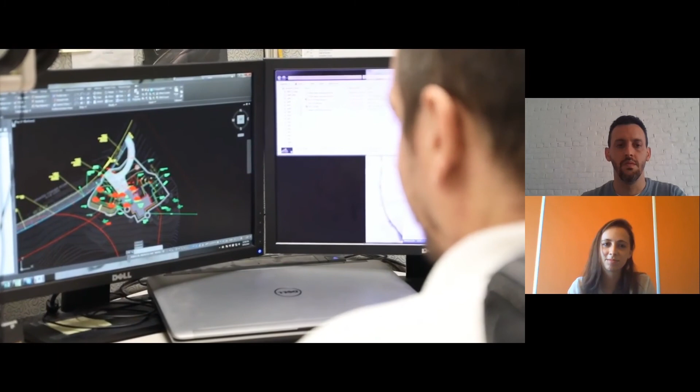While it's beneficial to the environment, I think what we're going to start seeing is the long-term benefits to the developers by actually incorporating these items as the environment changes. So I think it's on us as the design community to be as cutting edge and efficient and resilient as possible with the work we're doing. I think we need to rise to the challenge and have work that accommodates all modes of resiliency, both social and physical.

All right, so hope everyone is warmed up after that. Here today, it's myself. My name is Ed Confair. I'm the Senior Program Manager for Resiliency at E&LP Associates. What that means is I get to work on all of the cool projects where we get to incorporate green infrastructure into public space. And as both a civil engineer and landscape architect, that's kind of my dream. So I'm happy to share that work with you here today.

I'm gonna let my colleague introduce herself. Hi, I'm Megan Schmidt. I'm a project engineer out of the Philadelphia office for E&LP. I love working on projects that Ed loves working on. So green infrastructure and public spaces excite me. And when we get to combine them, that's a really impressive project for me.

So we've got three main principles that we've structured our presentation around today that summarize our approach to this topic of incorporating resiliency in the public space. So number one is a really big picture planning perspective, really at the government level. We're going to show a couple examples about how that happens, often before we as designers even get to come into a project. Principle two is defining criteria.

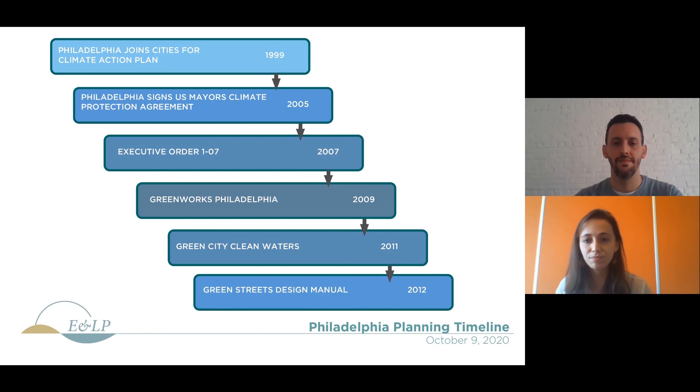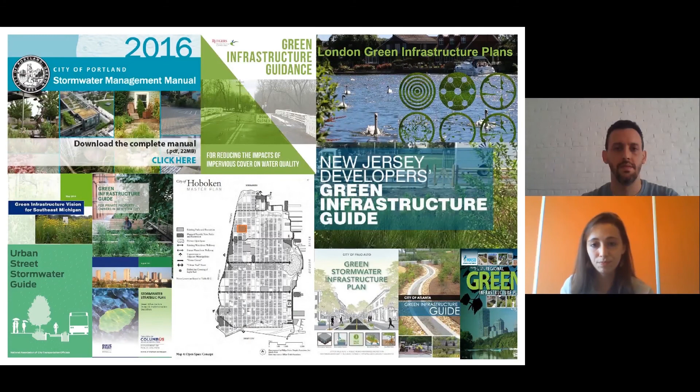So Philadelphia is not the only city making these efforts. Throughout the world, countries, cities, states have all adopted different guidance policies for designing stormwater management systems and becoming more resilient. Today, we're going to take a more specific look at the city of Hoboken and how its master plan goes from planning to reality.

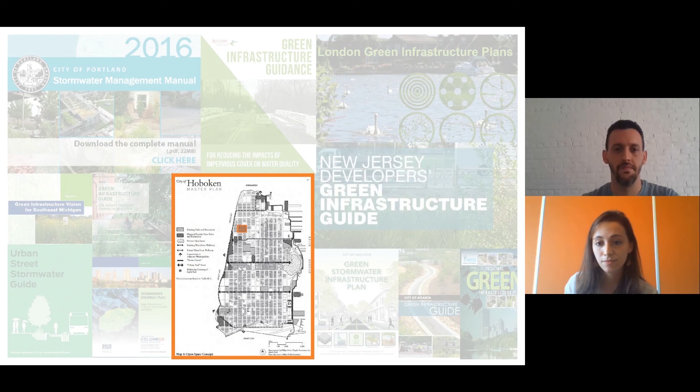So thank you, Megan. So Hoboken, New Jersey, just like with Philadelphia, this is a repeatable process for any governing body that wants to undertake a holistic approach to resiliency planning at any level of government, really. So, just like in Philadelphia, the early 2000s, Hoboken is very flood prone, and they started to look at their master plan and identify parkland and public space that could contribute to a long-term vision of resiliency planning.

They really followed through a decade later by realizing and adopting their green infrastructure strategic plan, which starts to identify specific sites throughout the city that can help them achieve certain performance criteria. One in particular is a large 5-acre lot in the northwest of the city, which became the site for the Hoboken Northwest Resiliency Park.

Hoboken is also a key city participating in the Rebuild by Design effort, and they're one of the few cities that partook in that effort that is following through with the implementation of the ideas and designs that came out of it. In 2017, they took action to actually purchase land to build a resiliency park on, and in 2019, the North Hudson Sewerage Authority, which is a key contributor and partner in this effort, adopted and adapted their long-term control plan for CSO reduction, featuring a key piece of infrastructure in this park.

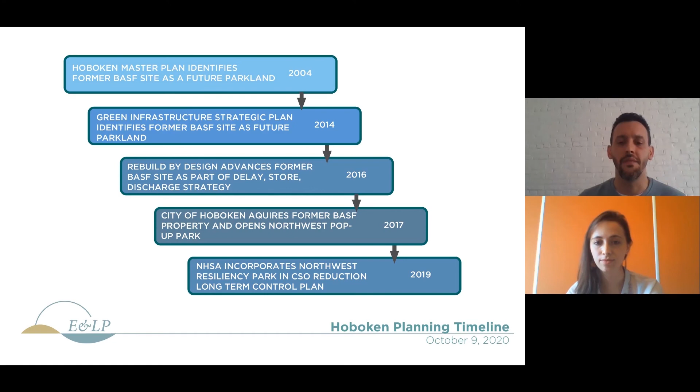So this is a look at the strategic planning document for green infrastructure. They took an approach of looking at elevation-wise what's in the city. Hoboken kind of has an elevated ridge running north-south in the city, and then it drops off until along the western edge of the city, you're really down in what was historically marsh and swampland. So the city identified different appropriate green infrastructure BMPs that could work at those different elevations and risk of flood throughout the city, and that created a framework on how to move forward with design projects in any one of those areas.

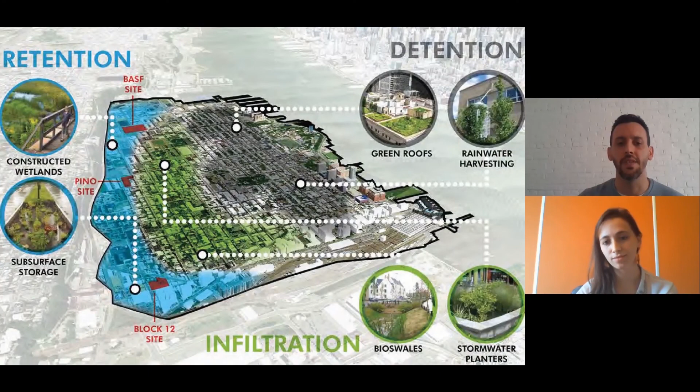So physical infrastructure planning. Remember, we're looking at physical and social and how they tie together. So we're going to start with physical planning here in Hoboken. So Hoboken, this is the outline. It's about 1 square mile. You can see this small blue rectangle is the site of the Northwest Resiliency Park. This is kind of a blow up looking at specific sewer sheds in the North Hudson Sewerage Authority District. The purple dots you can see here are different CSO outfalls. So it's a combined sewer overflow for anyone who hasn't heard the term before.

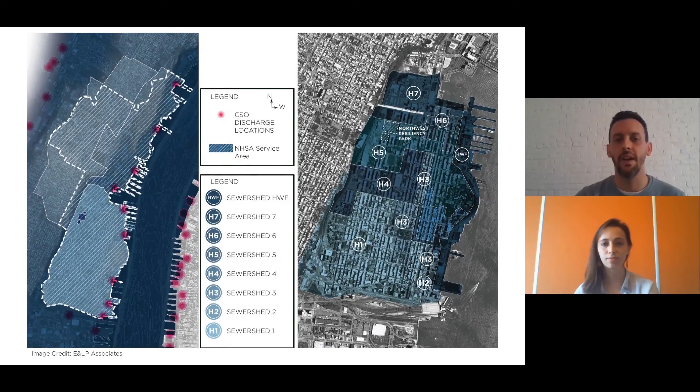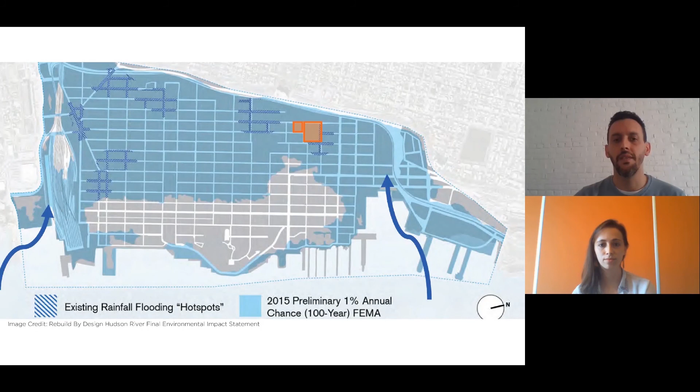And so you really started looking at what's the whole sewer shed, and then you start to see what are the sewer sheds that can be affected by an infrastructure planning initiative that's local, and that's the first step. You tie that in with the planning that was done through Rebuild by Design, again, looking at more localized flooding along specific streets and corridors and sections of the city. And then starting to identify specific locations and parcels that could contribute to a citywide flood mitigation strategy.

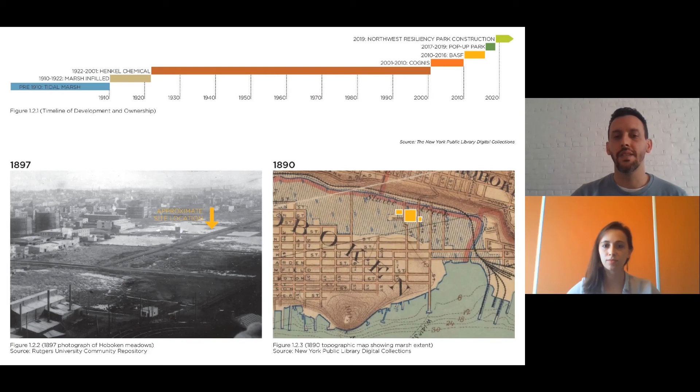This is a view of what the park looked like in 2017 before a temporary pop-up park was installed on it. This is a site with over 100 years of industrial use and contamination and historic fill on it. And it was and is still going to be an environmentally capped site. So looking at that history, we're kind of trying to point out where the site is through historic photos and aerials. For a long time, this area of the city is not developed. It's on marshland. And there's a history of chemical and industrial companies that carried out various work and facilities on the site through its history.

Again, even in the 1930s, this area of the city is still not really developed or built up. And then eventually you get to 2017. It was a very important transition for the city, for everyone and the residents to start thinking of this site as not just a fenced off former industrial lot, but as a public space. And so they invested time and money into putting a temporary pop-up park to change the narrative around this site and set the stage for the permanent installation that was to follow.

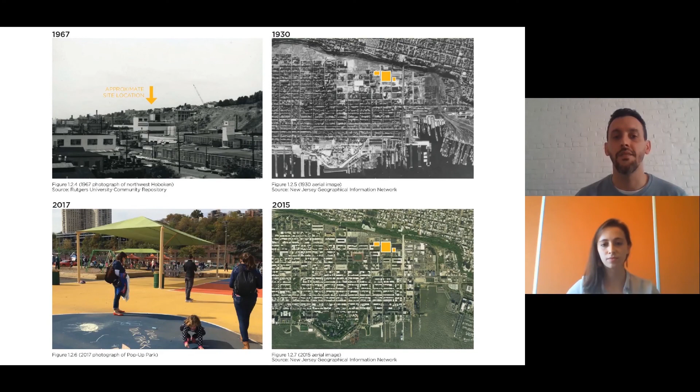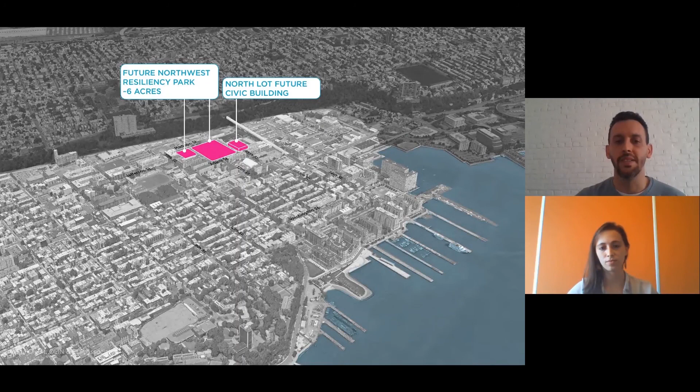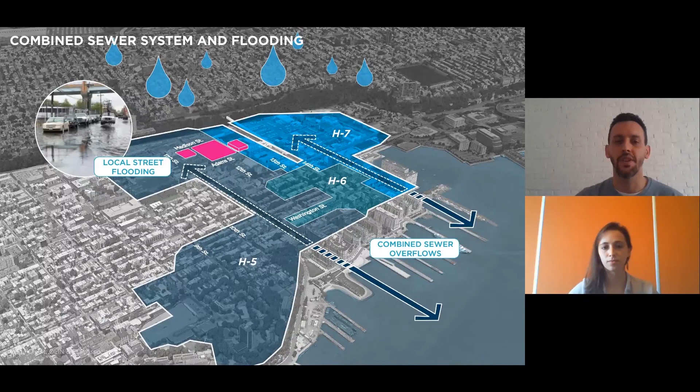So fast forward in 2017, ELP was lucky enough to lead a talented design team with OLIN and architects, and a number of other contributing members to undertake this project. And we really went through a 3-year process of design and public planning and public engagement to figure out what was the appropriate way to develop this site. And again, we were looking at the start very broadly across whole districts of the city from a large flood mitigation perspective. We knew what CSOs would be affected by any type of mitigation strategies or infrastructure implementation in the various sewer sheds, and that was step one.

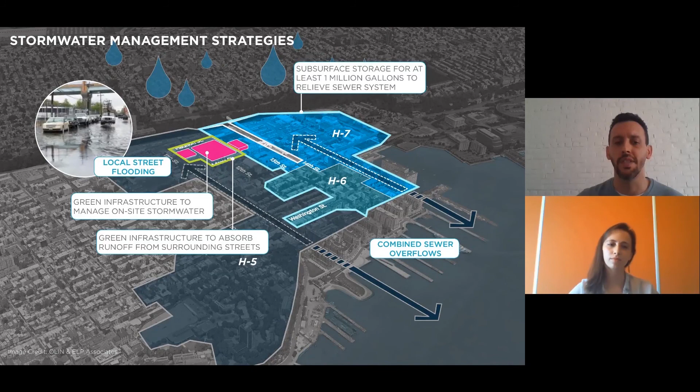Step two is we also knew that there was localized flooding issues, that we could put large below grade infrastructure that could address CSO overflows, but we still needed an approach for at grade surface level green infrastructure that could address the immediate neighborhood nuisance flooding. And so we really ended up with a dual stormwater management approach in that regard.

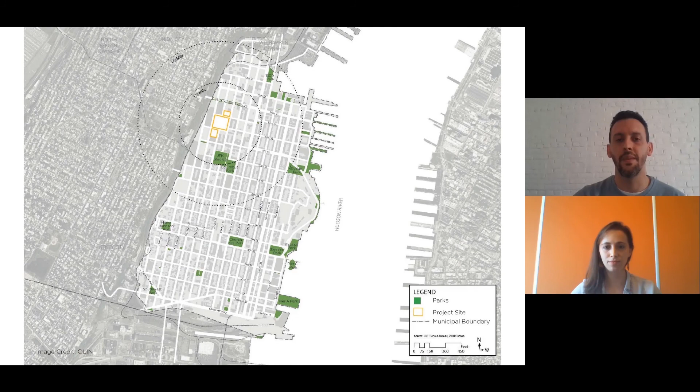That kind of brings us to the social infrastructure planning. Again, high level, looking largely at the city, what's in a quarter mile, half mile, and really when you expand to a full mile radius, almost the whole city is within walkable distance of this park. So it's not just a neighborhood park, this is serving the whole city and potentially some of the surrounding neighborhoods as well. We did an extensive needs assessment on figuring out programmatically what was in the city and what wasn't.

It was important with 6 acres. This is the last large piece of land in Hoboken that the city got all of the bang for their buck with what they put here. Just from a space constraints perspective, there's certain things such as athletic facilities that could only fit on a parcel of this size and couldn't fit on some of the remaining land. It was also important to see what the city wanted that they didn't have enough of. So this park had to serve a lot of masters and a lot of goals, and you'll see how we tackled meeting that expectation.

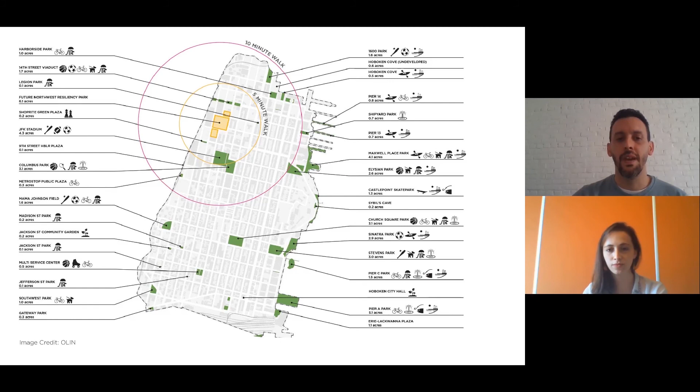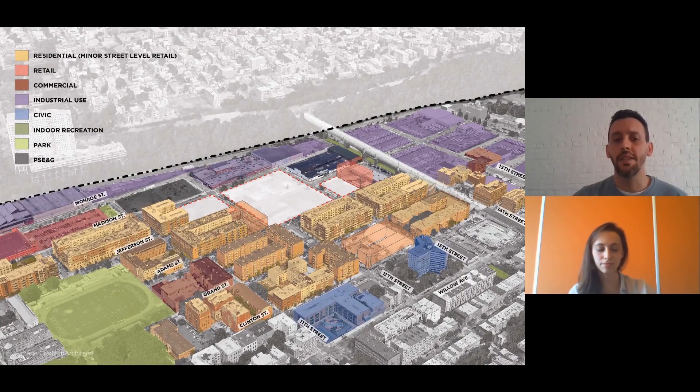We also looked development-wise. You can see in the purple here, along the west end of the city, fittingly called the West End Development, and along the north called the North End Development. These are 2 targeted redevelopment zones of the city. They're either vacant lots or kind of land banked with temporary buildings or old warehouses or bus parking. And the city wants to see those developed. So we needed to not only look at the park currently, but plan for future development and pressures that might come online down the road.

And then public engagement was extremely important. I can't emphasize enough how extensive, it was really almost a year of various stages of information gathering and meeting the public where they were at. We worked with the city to brand the park, to brand a logo for the park. We got t-shirts made up. Everyone knew both city and design team professionals when we showed up in our bright blue t-shirts to interact with them and ask them questions about what they wanted to see in their park.

We went to every public engagement scenario that the city had available for us to attend, harvest festivals, track runs, local parks and rec events, soccer games, just trying to make sure we were hitting all demographics and age groups to get feedback on what they wanted to see in the park. We had standard stage meetings where city professionals would speak in tandem with our design team, and we'd get into on-table drawing and modeling and charrette discussions.

One of the more interesting approaches that we took is, for anyone who's a design professional on the line and has done public charrettes, often we're using a plan that has to scale elements for buildings or parks or basins or parking lots. And we're kind of moving those around in configurations. For this project, since we knew the infrastructure both below and at grade was going to be so important, we tried for the first time to really flip that into a section view so people could move around trees, playground elements, benches, lighting, pavilion structures, etc. in section and kind of play with them elevationally.

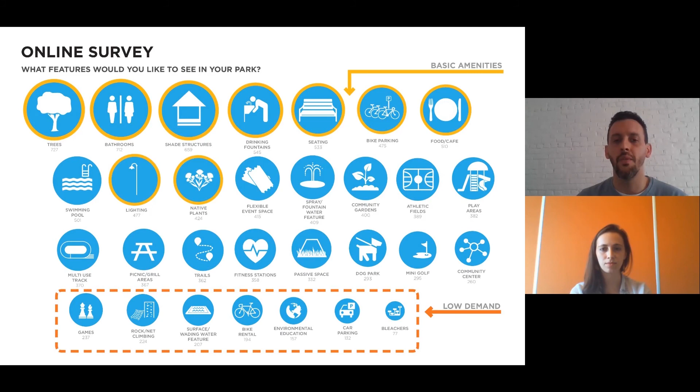And then in subsequent months we were really able to focus the discussion on what are the other must-haves that are unique. Do you want a water feature? Do you want it to be seasonal? Do you want a dog park? Do you want a mini golf green? Do you want a playground for all ages? So some of the more specific items, we were able to kind of guide the discussion to get to the bottom of what people really wanted to see.

We ended up developing 4 buckets of where the ultimate programmatic nature of the park needed to land. There were the natural elements: the incorporation of green infrastructure, shade, native gardens, pollinator gardens, a natural woody vegetation setting. Culture: the park was a civic center, there needed to be community space, there needed to be a cafe building, there needed to be comfort amenities.

Athletic facilities: again, at 6 acres, it was really the city's last chance to put in any type of multi-use athletic facility. And play: it really came out that it was important that this was a multi-generational park that had play not only for Hoboken's youngest, but Hoboken's oldest as well. And we really tried to integrate an all ages play approach in the final design. So that brings us to defining point number 2, and I'm going to turn it back over to Megan.

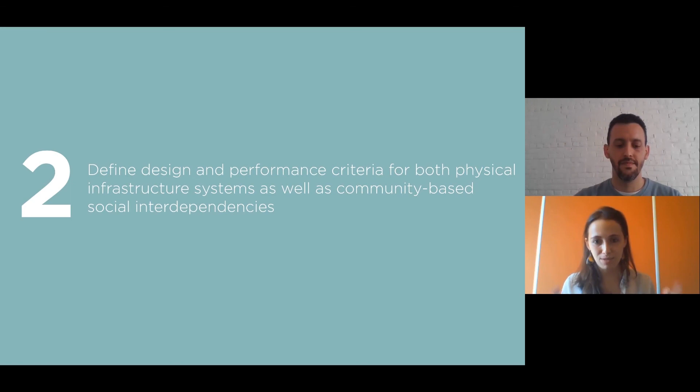So the idea here is to move from a more holistic planning view to a site-specific view, and guiding principle 2 describes that approach. It's to define design and performance criteria for both physical infrastructure systems as well as community-based social interdependencies. So we were looking at how we could meet these targets, and these can vary in what they mean by performance criteria, but what we look at is regulations, certifications, and metrics.

So when I say certifications, I mean sustainability certifications in this context. These can be very commonly building certifications. You might be familiar with the Living Building Challenge or LEED credit. That's a system that many people know about. You get different points to get an accreditation of different levels based on what elements you incorporate into your building, what materials, what energy systems.

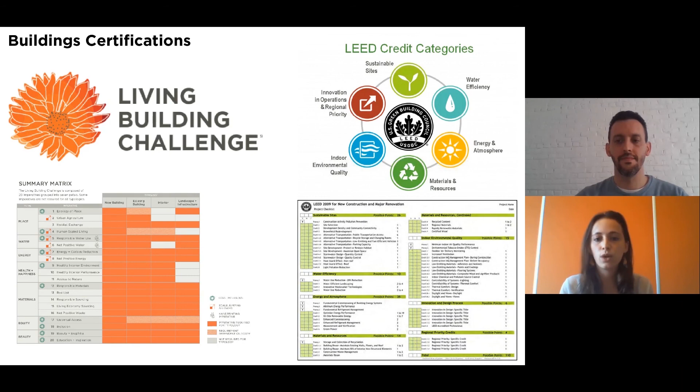Other certifications that might apply to a site can include appliance certifications, materials, and landscaping. The Sustainable Sites Initiative is something that we most commonly work with, and I'll talk a little bit about this when I discuss the Northwest Resiliency Park, but it's essentially a LEED equivalent for everything outside of the building to guide resilient design.

There are also a number of regulatory agencies that will set metrics for a site. So on a local level in Philadelphia, if you're working with stormwater, you're probably going to encounter Philadelphia Water Department. Any development over a certain size will trigger their review, and you'll have to meet the standards that they set forth. They have very detailed standards that they've adopted and adapted as they learn more about systems. You may also encounter Philadelphia Streets Department, Zoning and Planning, and a number of other local agencies.

On a state level, you might see the Pennsylvania Department of Environmental Protection, the Department of Conservation and Natural Resources, the Department of Transportation. It really varies on what you're designing. And on a federal level, agencies like the EPA and FEMA may play a role in your design decisions.

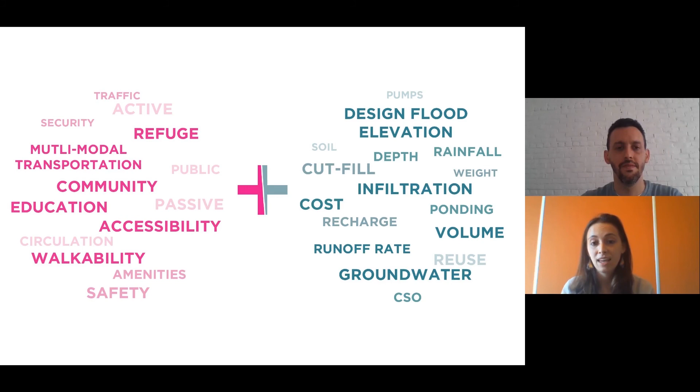And then looking at site-specific metrics. These can be a little more interesting and also challenging. They're not set by a regulatory agency. They're set by the stakeholders, the design team, the community, and the client. And they can be both for physical and social aspects of the site. So these word clouds here are just a few of the many, many metrics that could apply to a site. And we'll look at some of these and how they apply to 2 E&LP projects specifically.

So the first one I'll discuss is the Temple University East Park Canoe House. This one is in Philadelphia, right between the Schuylkill River and Kelly Drive. So several regulatory agencies did review this project. The project was over a certain disturbance level and triggered both Philadelphia Water Department review and the DEP. And they each set different metrics for what you needed to do for soil erosion and stormwater, just to ensure the site was meeting the local and state standards. This also triggered Pennsylvania Department of Transportation review because it opened up onto Kelly Drive.

There were no specific certifications for this site, so we didn't have anything that we were trying to meet in terms of LEED or site certifications. But we had a number of physical and social metrics that we were looking at to make the site more resilient. So from a flood management perspective, here was a big physical challenge.

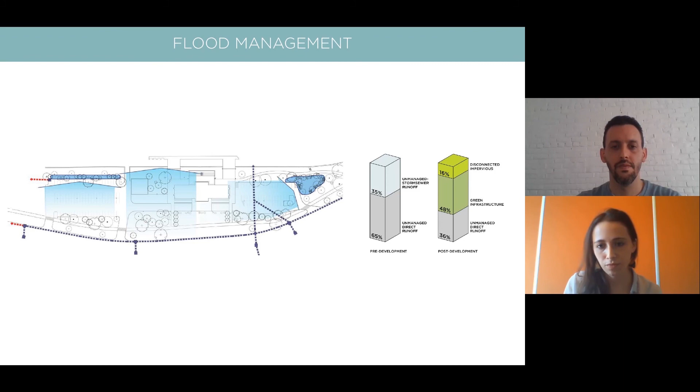Another physical metric for the site was a high groundwater table. We had to design basins where the groundwater was very shallow. So during pre-design, we did soil testing as you do for most stormwater projects. And then we designed basins to meet the criteria that they were a certain distance from the groundwater table. Of course, nothing goes exactly how you plan it to go. So during construction, we found that the groundwater table was even higher than the soil testing showed.

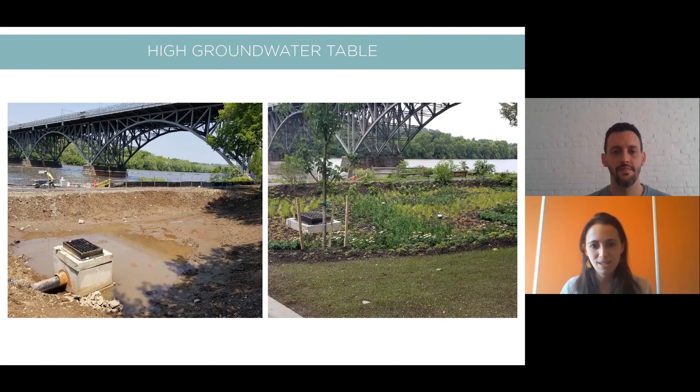I mentioned soil testing. Another challenge was that there was a low infiltration rate. So we had to manage the same amount of volume, but we couldn't infiltrate into the soil. So that meant larger systems, and it also meant incorporating liners so that we could ensure the water was going where it needed to go.

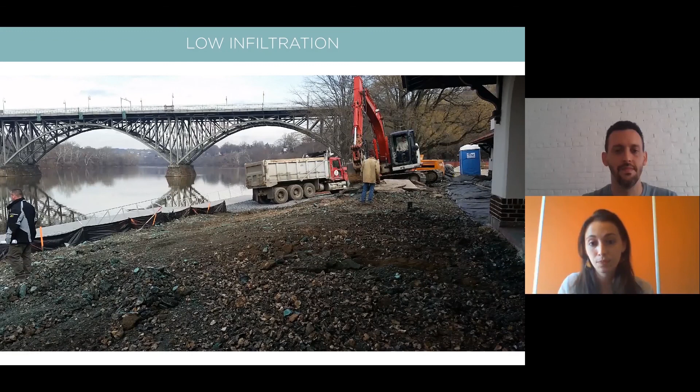From a social perspective, we had a number of metrics, one of them being connectivity. This site is located right in the middle of the Schuylkill River Trail. So this is a major connecting route for Philadelphia pedestrians, bikers, and joggers. And we needed to ensure that we maintained that route and that it was integrated into a larger planning system.

In existing or pre-development conditions, there was no amphitheater and the crowd would just gather on the lawn. I know it's very strange to think about crowds right now, but everybody packed together. It was hard to get a good view. So the final design incorporated a more optimal crowd and audience platform.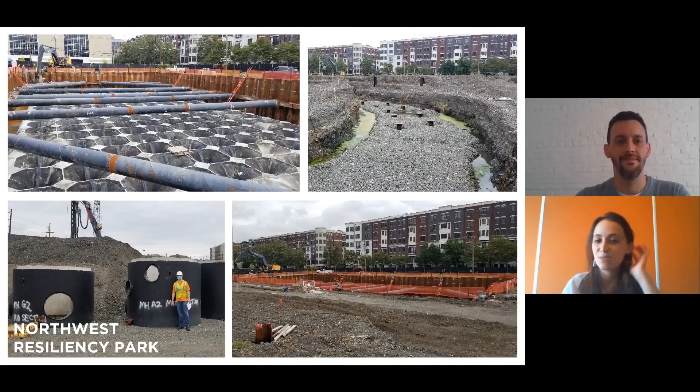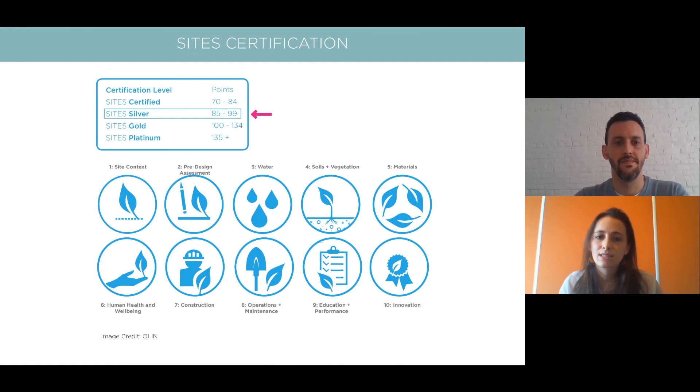This site did have sustainability certifications that we needed to meet, set by the client. So we were going for a SITES Silver certification. The interesting thing about this program is that a lot of the credits that you can achieve were already incorporated into our design process. SITES certifications encapsulate what it really means to be resilient outside of the building. So we did things like incorporate above and beyond stormwater management, community engagement. We connected existing transportation routes, and we incorporated flood management.

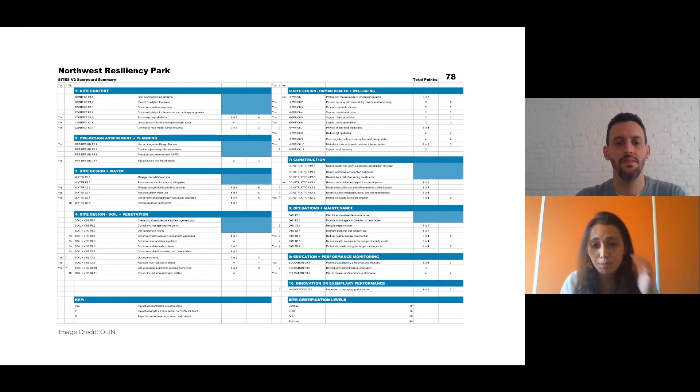From a regulatory perspective, we had a number of agencies involved in this project. For instance, at the New Jersey Department of Environmental Protection pre-application meeting, we had members from land use, water quality, New Jersey Infrastructure Bank, wastewater discharge, site remediation, government relations, and a number of others, all at the table. We had to meet all of their regulations, which was a big collaboration between the city government, the state government, and our design team. We also had to meet federal site remediation standards of the EPA.

We had to get permits from the Hudson-Essex-Passaic Soil Conservation District to permit our disturbance. And we also had the North Hudson Sewerage Authority really involved in the project, not so much in a reviewing capacity, but in a partnership. We were incorporating their long-term control plan goals, but also working with them to install a physical pump station on the site.

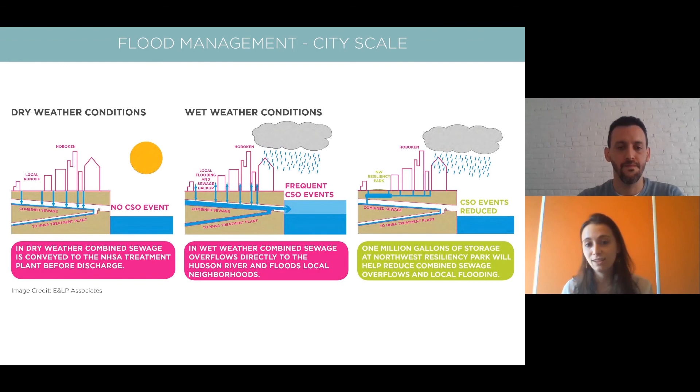So looking at the metrics for the site, this was a physical metric. We needed to provide flood management. And we did this on a city scale and a local scale. On a city scale, Ed discussed this earlier, but we were looking at reducing the amount of combined sewer overflow events for the city. We did so through a 1 million gallon subsurface detention basin installed below grade on the site. And the goal here was to reduce the amount of sewage that would flow directly into the river during large storm events.

So the subsurface detention basin is a tool to manage floodwaters, and we had to look at it for all the different possible metrics and really optimize what we were getting out of this system. That included looking at space efficiency, cost, maintenance feasibility, installation feasibility, buoyancy calculations. Would this work with our environmental cap?

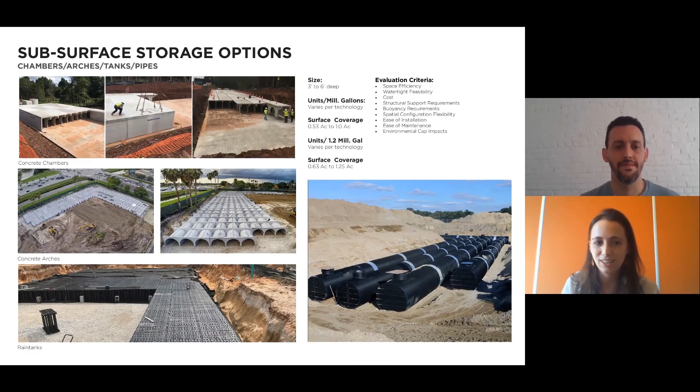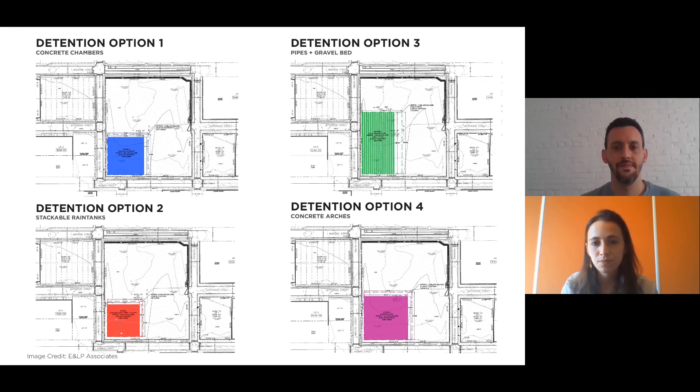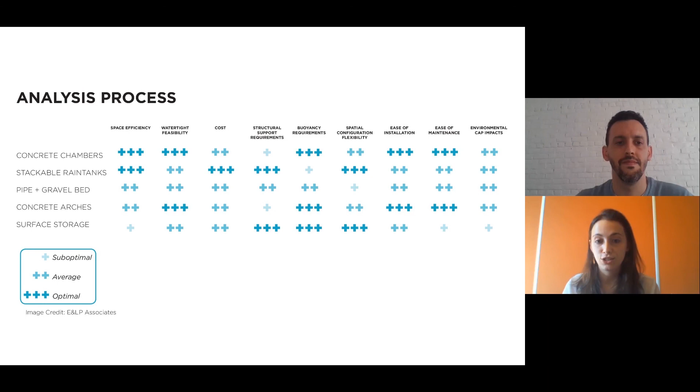Here you can see 4 different options and how they laid out on the site. So we had concrete chambers, pipes and gravel beds, stackable rain tanks, and concrete arches. And each of them had different footprints on the site to store the same amount of volume. In addition to space efficiency, there were all the other metrics that I had discussed. So we made a matrix to see which options gave us the most benefits. And that ended up being concrete chambers followed by concrete arches. So those are the larger scale city flood management tools.

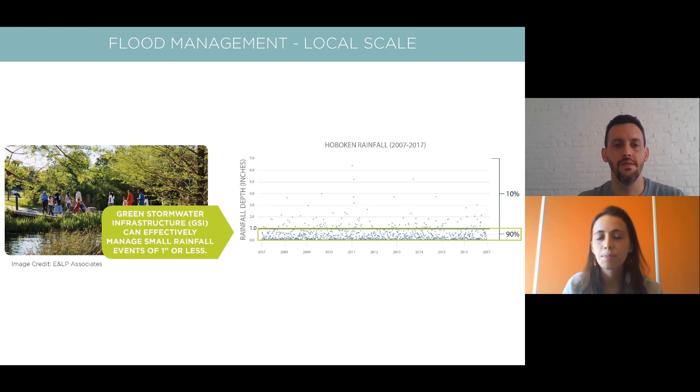To understand how we were going to manage it, we looked at the topography of the site through detailed survey, identified low points and high points. And then we took those drainage areas that we mapped out and we modeled them in HydroFlow using NOAA rainfall data to understand where the existing conditions were. And in New Jersey, you have set reductions you need to meet for the 2-year, 10-year, and 100-year storms. So even before we started stormwater management, we knew what the target was for peak flows off the site.

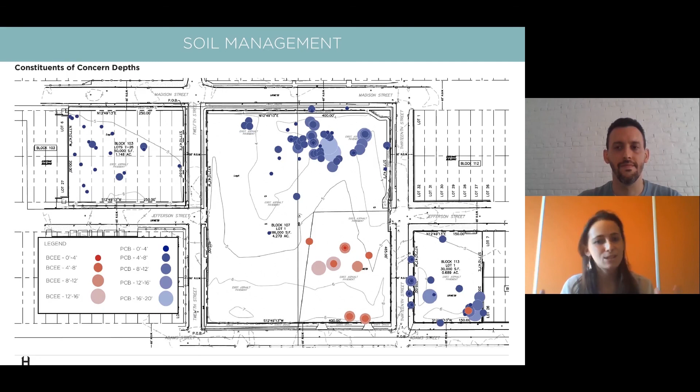Another major physical criterion for the site was soil management. So the site is contaminated. You can see here mapped the constituents of concern, BCEEs and PCBs on site. We had to provide environmental capping to state and federal regulation standards. And the goal here was to reduce the cost to the city by keeping as much soil on site as possible, because it's expensive to excavate 20 feet of soil and ship it off site. So the approach here was to balance cut with fill.

So on the left, you'll see the existing asphalt cap. There's very little topography on the existing site. But we knew that we needed to, for instance, install a 1 million gallon storage tank. So that's a lot of cut that we needed to balance with fill. And the idea with the fill is that it would create interesting topography across the site that could be incorporated into play features and park amenities.

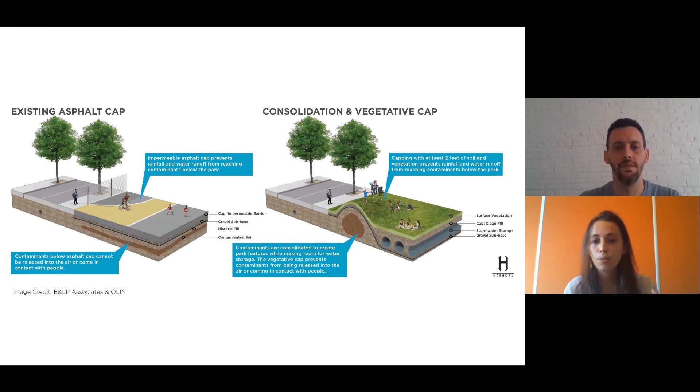One element that interacted with this topography was the cafe building. And we had to look at how we could get it as far out of the base flood elevation set by the city as possible. We wanted to make sure that we minimize the amount of floodproofing needed. So you'll see different elevation studies here of how that could be achieved. Different slopes, what was realistic on the site.

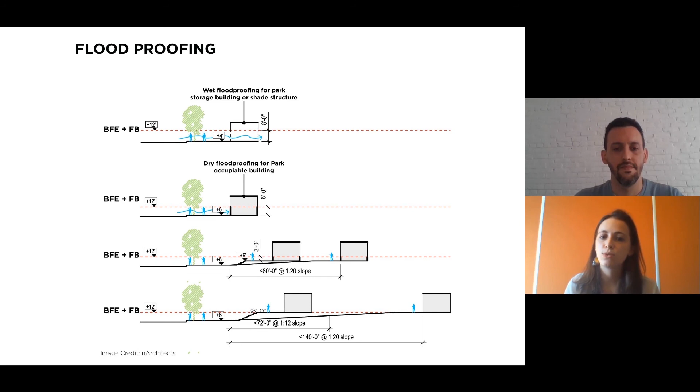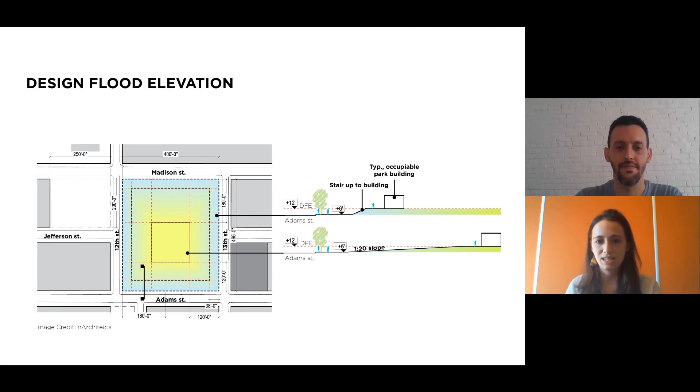And then we looked at the site and where these models could be realistically incorporated. So we mapped out the location of where the building would go. We ultimately decided on a hybrid of raising the topography and floodproofing part of the building because it wasn't realistic to push the building entirely out of the base flood elevation and maintain park amenities.

In terms of social criteria for the site, budget management played a huge role. It plays a huge role in any public project, especially looking at a municipality. They have a set budget of what they can spend. We were lucky to work with Hoboken, who had funding partners, both for loans and grants.

So in terms of loans, we had the New Jersey Infrastructure Bank, NJEIT, and they provide low interest loans on certain types of infrastructure. So during the budgeting process, we had to separate green infrastructure from gray infrastructure from other site amenities and figure out how much of the loan that we were eligible for. It also set a timeline for the project because we needed to complete the design and get it approved before the end of the fiscal year.

We also were able to get grants from the Open Space Fund for the county, as well as FEMA, who gave us $10 million for the project. The city continues to apply for different grants even as the project's constructed.

Another social factor was maintaining accessibility. So this park was designed for people of all ages and all demographics. We needed it to be accessible to everyone. So this meant fine grading the entire site, ensuring that major pathways were ADA accessible.

This that you'll see on screen is a detailed plan of raised intersections around the site. These were the entrances to the project. And it was challenging because the existing topography in the roadway created localized low points and there was existing infrastructure. So incorporating ADA accessible routes from adjacent streets and working with the existing grade was a challenge.

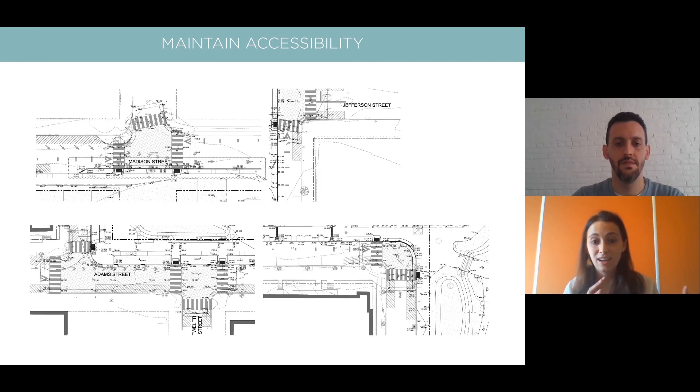And looking at another social aspect is maintaining adequate transportation on a vehicular level, for bikers and for pedestrians. That's a complex transportation study, and you can see on the left side, the city had decided early on that 12th Street would be closed between the two parcels of the park. So they're re-emphasizing transportation needs of pedestrians over vehicular needs. We studied different ways of how the vehicular transportation could adapt to this change.

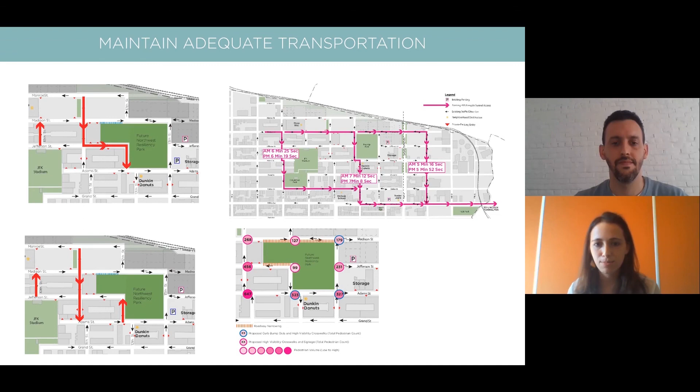And then on the bottom right, you'll see that a pedestrian study was also done. We incorporated different bikeways in the roads and different striping to indicate how we could safely accommodate bikers around the site. Now I'll just hand it back to Ed to get to our third guiding principle.

Thank you, Megan. That was a great look at two projects that really went above and beyond to incorporate resilient strategies into two awesome public spaces. And we're going to continue to build on that here in the third section of the presentation. And so that's understanding the opportunities for incorporation. So you've done all this work at the strategic planning level. Now you're designing a project.

You've spent months, if not years, reaching out to the public to do all that due diligence, understanding the regulatory framework you're in. And now you want to use what you know and those constraints to leverage them the best way possible and come out with a really creative and fun place at the end of the day. So, here's a couple examples that we want to give to show what that end product could start to look like.

Again, on our theme of social resiliency plus physical resiliency, for the Hoboken project, even during the RFP phase, our design team had this idea of having a one-for-one match of any type of infrastructure element with any type of social amenity or programming. And so all the way back in the RFP, what we really think won us the project was showing them that we had already thought out all the different types of BMPs that they can use. This is going to be a resiliency park.

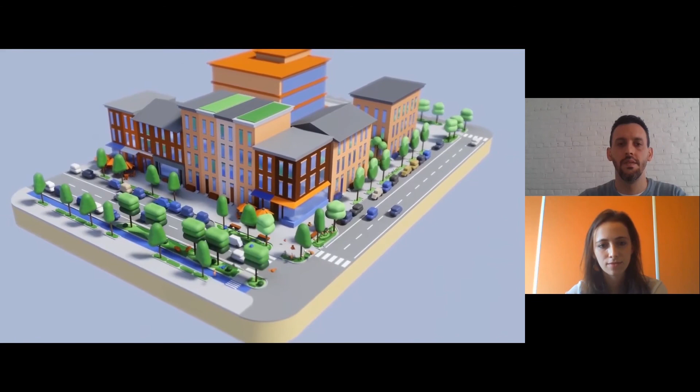So we often hear green infrastructure meets the triple bottom line. The triple bottom line is environmental, community, and economic benefits. Environmental benefits, you're providing pollinator habitats. You are cooling down surrounding areas, which makes it habitable for both humans and animals alike. Community benefits include creating recreational spaces, reducing crime rates, and even improving public health.

And the third component of triple bottom line is economic benefits. So green infrastructure has the ability to improve property values and attract more people to businesses. Economic benefits also include green job creation, maintenance, installation, construction, and design. So you get a beautification, you get some really cool site features. There's a lot of added benefit by using a green infrastructure approach.

All right, so just real quick off the top here before doing a deeper dive, just some examples of stuff we've got in the works. This is a project in Paterson, New Jersey, along the Great Falls National Historic Park. It's the Quarry Lawn Project, where there is an old excavated quarry. It has a lot of old dye houses from the Allied Textile Mill district that was there.

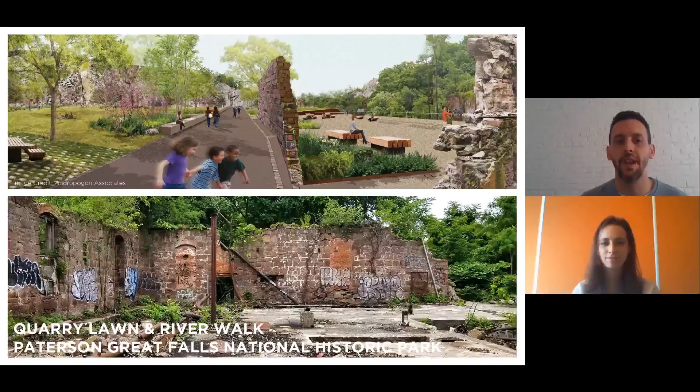And we're reusing all of the old historic runnels that were used previously for dyeing at the turn of the century, and now reusing them as green infrastructure, rain gardens, basins, or bioswales to manage stormwater on the park and turn it into a passive space for the city.

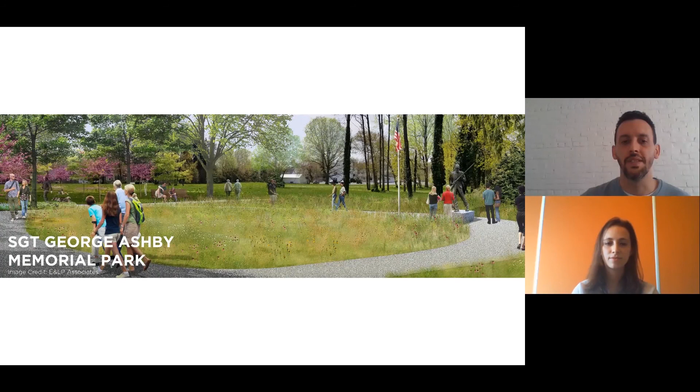This could take the form of a small project that we have in Allentown, where there's the Sergeant George Ashby Memorial Park. We're making sure all of the pavement in the site is porous, as well as proposing that the monument is actually set in a field of pollinator gardens and natural meadow landscape. So again, just trying to introduce sustainability and resiliency wherever you can, even if it's a small local project that doesn't have a big population, you can still bring resiliency to the community.

One of our smallest projects is a children's garden at Over the Rainbow Nursery School in Montclair, New Jersey. The school had this idea of a stumpery where kids and their parents could bring stumps that they found on their property or when trees came down and kind of watch the natural decay process. And we thought that would be great to put in the low area of the garden

and turn it into a rain garden feature. So the rain garden is planted with sedges, ferns, other appropriate plant palettes, and then it's also got all of these cool gnarly stumps kind of dotted around it, and it's a key education feature for the school. So we get them as young as preschool age. It's never too early to start them on the resiliency path.

And then locally, I'm sure a number of people on the phone have worked with the Community Design Collaborative. It's a great organization. Participating in their charrettes can be a really rejuvenating design exercise, and it really allows you to engage with the community. So this is James Dobson Elementary School in Manayunk. It's one of the first projects we did with the collaborative.

And again, we came up with a feature of this long linear, what we called a rain channel along this back blue wall on the site. Again, everything was sheet flowing to this wall. In the existing condition, it's just handled by 2 very small inlets which often overflow or get filled up with debris and cease to function.

And so we had the idea of you have a bioretention long linear feature and you adapt the program along it, whether that's an outdoor classroom deck with a chalkboard wall or different types of check dam with seating or bleachers that cantilever over it, looking out over a basketball court.

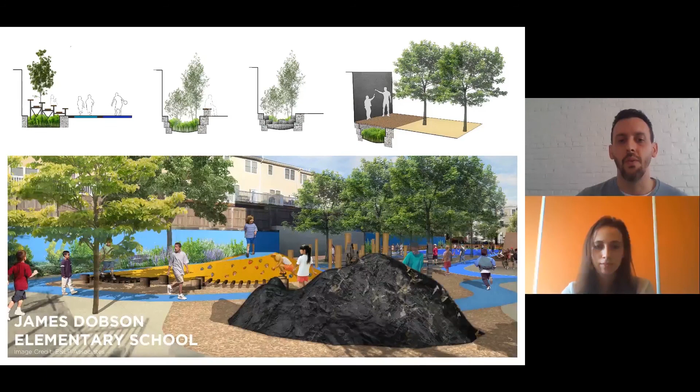Those are just some quick guides, and then we're going to return to our main case study that we've been reviewing here, the Northwest Resiliency Park, because the project is under construction. We're very excited about it, and a lot of the images that I'm about to show you here are just a couple years away from being realized.

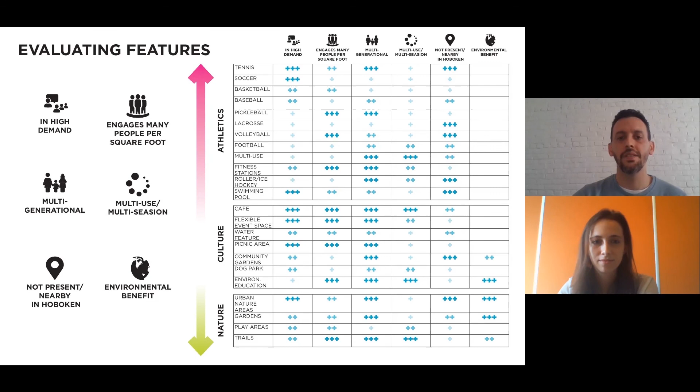So to revisit, we had these core buckets of programmatic elements: nature, culture, athletics, and play. We had extensive surveying. And we had all the metrics about how to prioritize all of these different types of amenities, right? So we've had the strategic planning, accomplished under guiding principle 1. We developed all of this hard data in guiding principle 2, and then here's how we really deployed it on the site in the design.

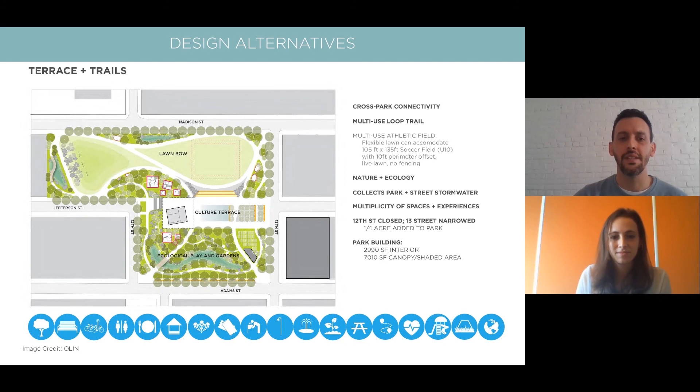So like most projects, there was a lot of iteration. There were more than a dozen, if not 24 iterations on what this park could look like in the early concept phases. I'm just going to show you the 2 favorites that came out of the public process. So we had one called Terrace and Trails, which was a little more civic focused. There's no defined athletic field area. It's more of a flexible open space on the west side of the park. The idea of a cultural terrace that housed building amenities and community gathering spaces, and then a more idyllic park setting integrated with stormwater gardens.

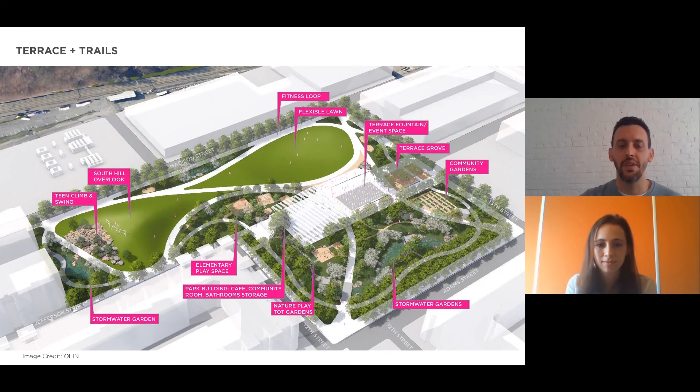We felt it was important to keep consistent language. We always presented to the public plan, section, axonometric, and elevation views consistent between all the design options. And we always told the stormwater story. Every drawing had a stormwater layer to it, to show how it was functioning to meet the project's and the city's goals of flood mitigation and resiliency.

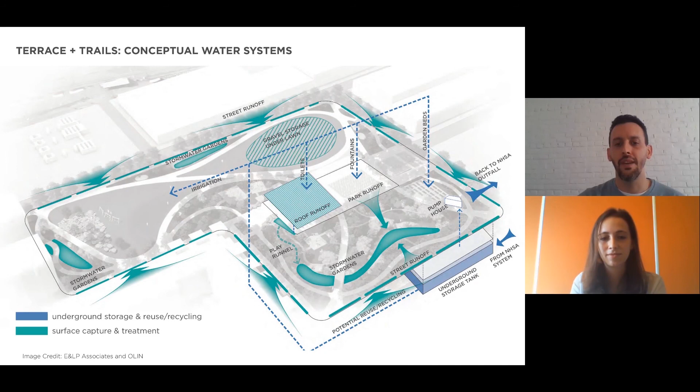So here you can see the early concepts about capturing perimeter roadway runoff into green infrastructure features, and then early ideas about gathering stormwater either below or at grade on the site. And then of course the large 1 million gallon flood mitigation tank that Megan showed everyone. So again, section view, always showing stormwater, plan, section, axonometric.

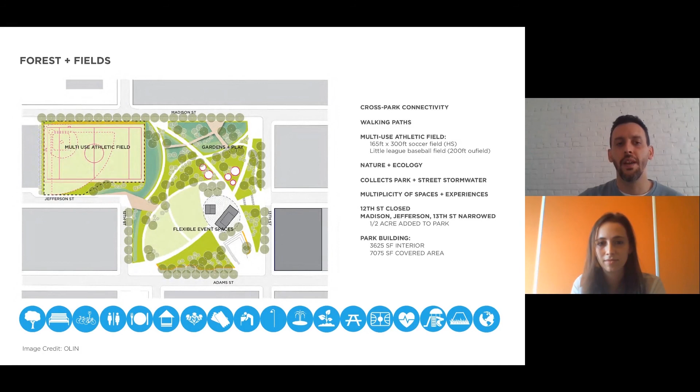The second one was this idea of Forest and Fields, had a little bit more stormwater, and again, worked in the big multi-purpose athletic field. We repeated the same visual language, looked to deploy the same type of gardens. You can see this one had a lot more surface bioretention than the previous one. Also took advantage of saying, hey, the athletic field could really serve a dual purpose and provide a lot of stormwater management. And again, there's the large 1 million gallon tank. We looked at it sectionally as well.

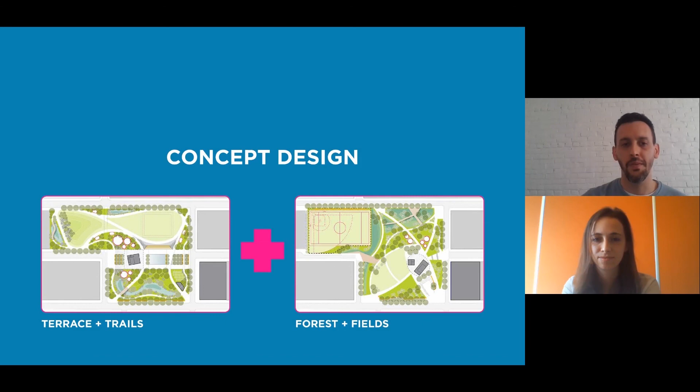And like most projects, in the end, when you have 2 designs, instead of picking one, your client usually says, what if we take a little bit of A and a little bit of B, and we marry those together? And of course, we're always more than happy to make our clients happy and do an extra round of work and come up with something that really works for everyone.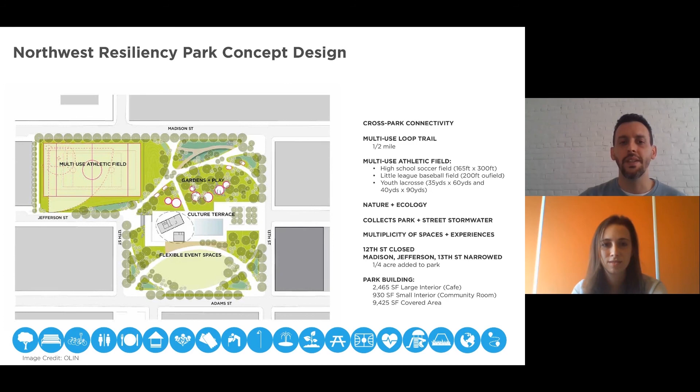So, in the end, the athletic field was extremely important to this community. They weren't going to have another public parcel come available that they could fit something of that scale on. But we also really didn't want to lose the ideas of this culture terrace and having the stormwater gardens and flexible event space. So the scale of some things got rejiggered so it could all be accommodated. But in the end, we were really happy with the distribution and mix of programmatic elements that we were able to fit into this park.

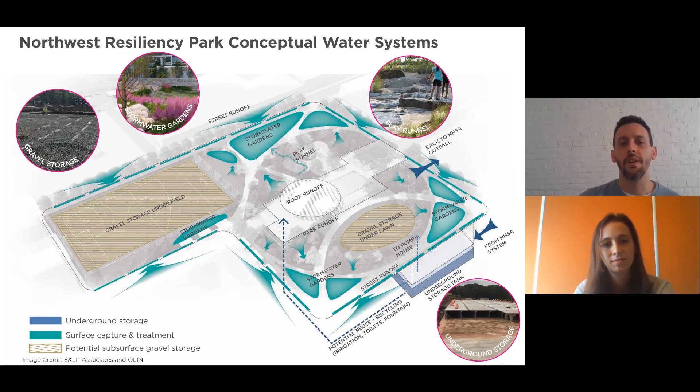So we looked at everything again, kept the visual language consistent. And our stormwater at this point started to get a little more refined. You can see we're starting to think about where water comes in, where it comes out. We're starting to think about water reuse, if it was potential to use all of that water in the 1 million gallon tank. Different types of BMPs. Could we do some shallow, underground gravel storage that was working in tandem with the surface level bioretention features? So we're starting to get a little more sophisticated in the thinking, but we're still at the conceptual level.

And then that brings us to the final plan and details. This is when we really honed in. We started to get specific about what the various colors of green on the plan meant. What was a basketball court? What was a boardwalk? What type of striping was the athletic field going to have? How big was the community space and the cafe going to be? You can see we eventually worked in a fountain and ice rink feature.

How big was the great lawn? We did a lot of studies on what size crowds could fit on that lawn, and then therefore what type of program or events the city could host at the park with that amount of square footage available to them. There's a movie screen built into the roof of the pavilion structure that can come down so people can watch movies on the lawn. So it was really a sophisticated design in the end that had all of those civic elements, the recreational elements, and all the stormwater.

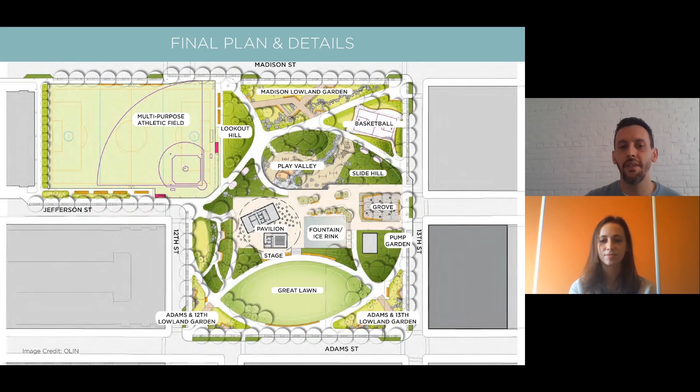There's stormwater ringing the site, not only at the perimeter in bump outs, but every park entry is through the threshold of a bioretention feature. And you can see the finished aerial perspective. And then again, the stormwater perspective. And I really give the city credit. If you go to the site right now and look at the construction fence, both this image and this image are on the huge banner telling people what is going on at the park.

So even through the construction, we really felt it was important in the messaging of this park to show people what was involved. And so you can see again, stormwater at all the thresholds. It's a major element on the site. We did follow through with planning underground storage shallowly under the athletic field. We ended up having two different reuse systems. There's a separate gray water reuse system attached to the building.

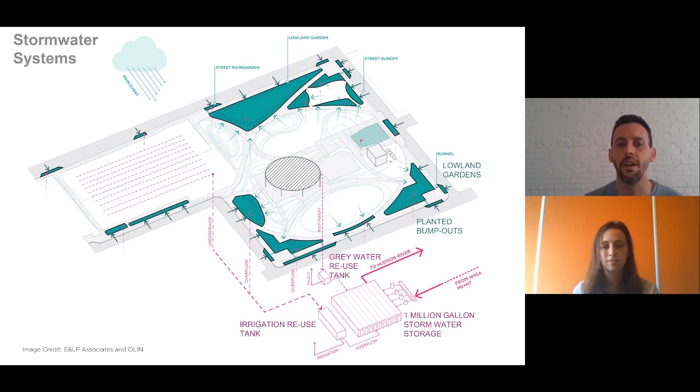And then all of the surface bioretention features overflow to a 50,000 gallon cistern tank, which is going to provide all of the irrigation on the site. And then finally, there is the large 1 million gallon tank, which buffers the entire sewer district in the area. So we're really happy with that distribution of infrastructure and really felt like we were hitting all of the check boxes of citywide, local neighborhood wide, and then on site. The park is really going to release no runoff in and of itself into the area, which is a huge relief on the taxed CSO system.

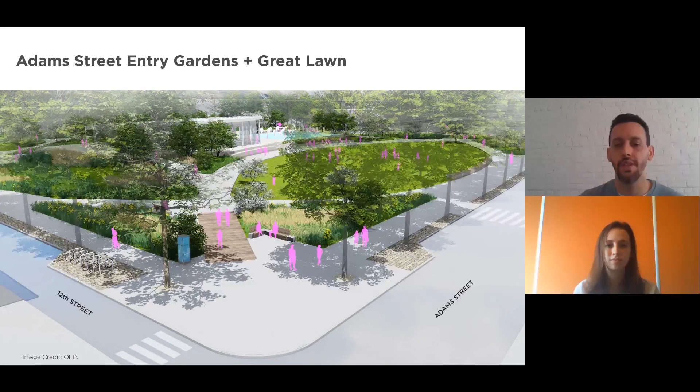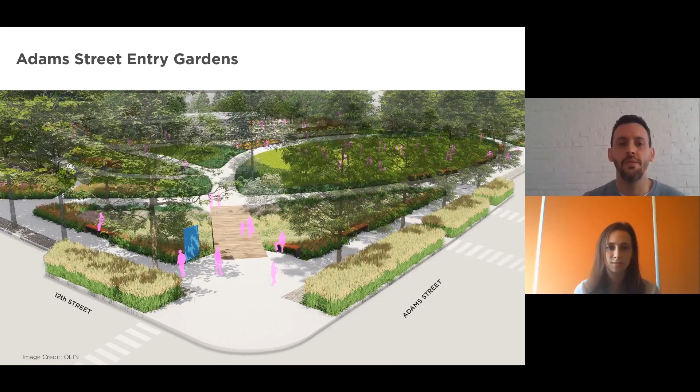Looking at those thresholds, again, an example of an early rendering, looking at what the street corner could look like if all of the infrastructure was just interior to the park, and then comparing it to what it could look like if it was both interior and exterior. We were very happy that this version is the one we went with in the end. So you're always passing through this gateway, this resilient gateway of green infrastructure coming and going from the park.

Looking at each of the major programmatic elements, there is the athletic field, which provides a large amount of storage underneath it. So water comes in, it infiltrates right through the synthetic turf surface into a gravel storage bed, and then that is slow released back into the cistern system for water reuse. It does not go back into the CSO system. It's very important we have a ring of infrastructure making sure no water leaves the site to overtax the CSO system. On the other side, we had a play valley, a basketball basin, some lowland gardens. These are some of the more exciting amenities that we integrated green infrastructure into.

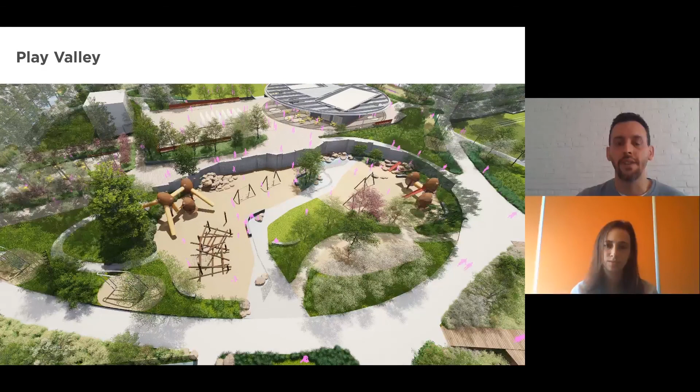So looking at the play valley, our consultant Studio Ludo did a fantastic job envisioning the play features. There's a stream through the middle, and again, there are low profile gravel beds of storage and drains below this. So there's different sand pits for play. This is a porous wood fiber mulch surface. So again, it basically acts as a sponge. All the water that falls on it is going to infiltrate right through the wood fibers into the below grade storage bed. And again, it's going to be slow released back into the cistern system for reuse.

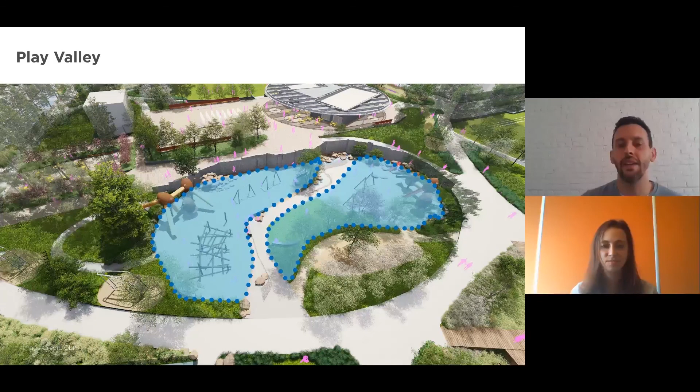The basketball basin, I think everyone thought was one of the cooler things that our team came up with. It was also one of the last amenities to be added. This was more of just a passive garden seating area. And the city council were really adamant, could we get another piece of athletic, active recreation programming in this park? And we were all thinking, where are we going to fit it? And we were like, it'd be great if we could get a basketball feature on here.

And originally this entire corner was a large basin. And we were like, well, we can't afford to lose the stormwater storage if we have a basketball court. And we said, what if it's not a court and it's a basin? And that was kind of the big aha moment.

And so the court is actually sunk down 2 feet. So you either ramp down to it or come down in steps. And so in dry weather, it'll function just the way any other court does. And in wet weather, it has 2 feet of storage that will slow release out through breaks in the retaining wall that surround it into adjacent bioretention basins. So the water gets stored, it gets slowly released and filtered, and ultimately when it leaves the basins, again, it goes back into the reuse system, into the cistern at the end of the day.

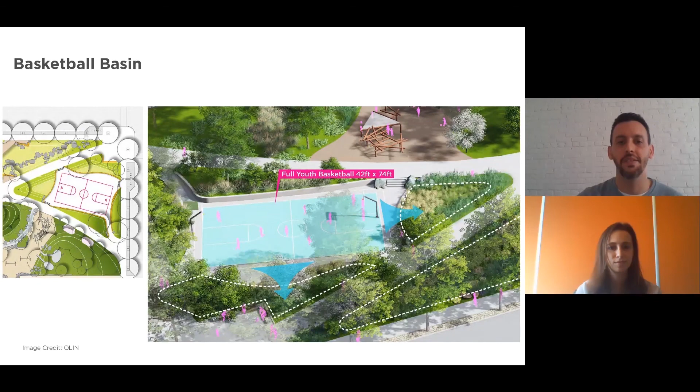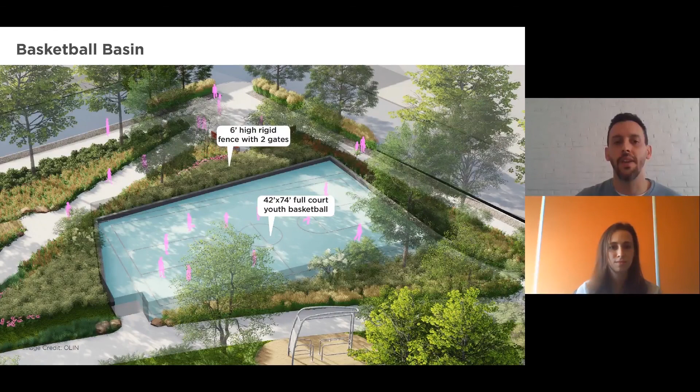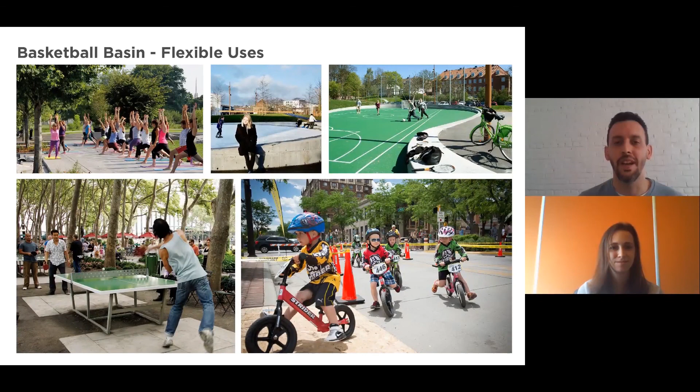Another look at that and kind of that perimeter wall. So we have regularly spaced perforations at the base of that wall to kind of regulate the slow release from the basin into the surrounding rain gardens. And we also, again, made the point that anything in the park could do double duty or triple or quadruple duty. So you could use the basin when it wasn't being used for basketball or for any other number of active rec elements as well.

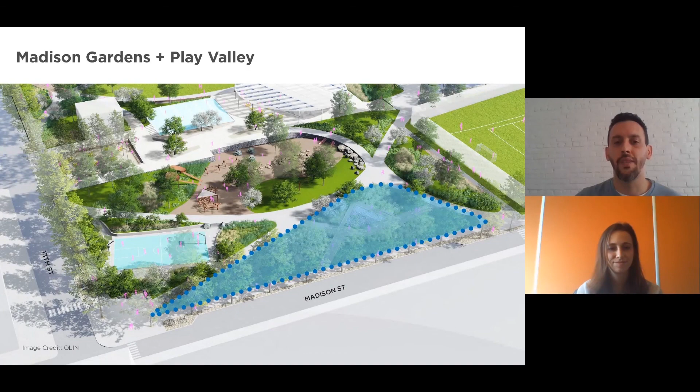And then finally, kind of the most beautiful, dedicated rain garden or bioretention feature on the site is the Madison Lowland Garden. And here we just really wanted to make the point that a stormwater garden could be beautiful in and of itself. Going and presenting at the city council meetings throughout this project, it was an effort, especially at first, to get across the point that rain gardens are not weed-filled areas that get left over at the end of a project and no one takes care of, that they are in and of themselves an amazing amenity, not just for people, but for the natural environment, pollinators, etc.

And so here we have a deck system that meanders through the garden. It also kind of has an overlook area here where we concentrated particularly pollinator habitat. So we were kind of calling it the pollinator amphitheater, where we're envisioning people will come and sit and take in the park and watch the butterflies kind of put on a show for them as they hang out in the garden.

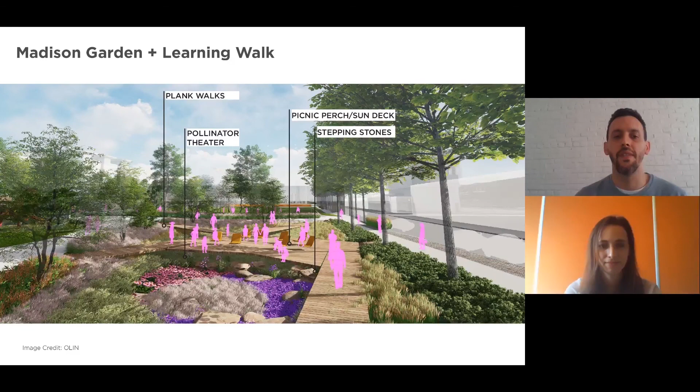And finally, we kicked off construction last fall. It's been going strong all year. You saw some of the below grade infrastructure going in some of the slides that Megan showed earlier. Everyone on the team is really proud about that work. I'd be remiss if I didn't mention all of them. It really took a village on this one, and everyone contributed at a very high level to help realize this park.